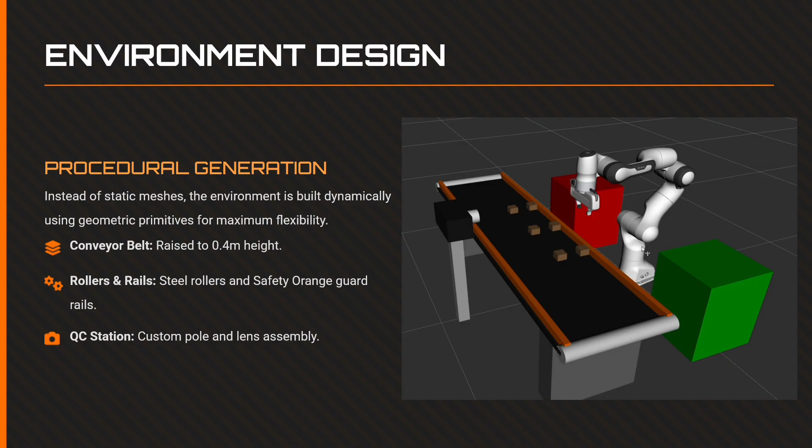First, the environmental design. Rather than relying on static mesh files, I utilized procedural generation within the code. I constructed a realistic conveyor belt system using geometric primitives: a black rubber belt surface, polished steel rollers, and safety orange guardrails. This required precision calibration, as placing the belt at a height of 0.4 meters meant retuning the robot's grasp parameters to avoid collision.

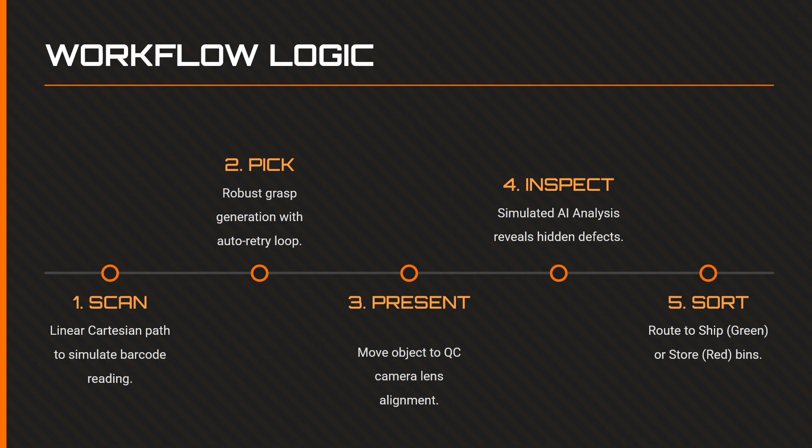Second was the manipulation logic. I moved beyond simple point-to-point movement. This robot executes a complex state machine. It performs a linear scan using Cartesian path planning to simulate reading a barcode. It utilizes a retry logic loop, attempting three different grasp solutions if the inverse kinematics solver fails. Finally, it brings the object to a custom quality control station, a camera assembly I modeled in the simulation, aligning the object specifically with the lens for the inspection.

Third, the graphical user interface. I developed a full dashboard using Python's Tkinter library. This GUI replaces the command line, offering a real-time status bar, a dynamic inventory grid where buttons disable automatically to prevent race conditions, and a decision panel that only unlocks when the robot is ready for the human input.

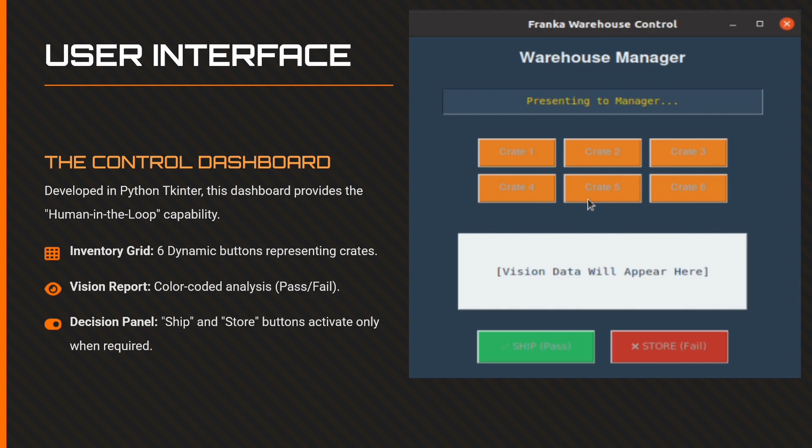Finally, the creative component. I implemented simulated computer vision, a backend database that assigns hidden defects to crates when they spawn. The system reveals this data only when the robot presents the item to the camera station.

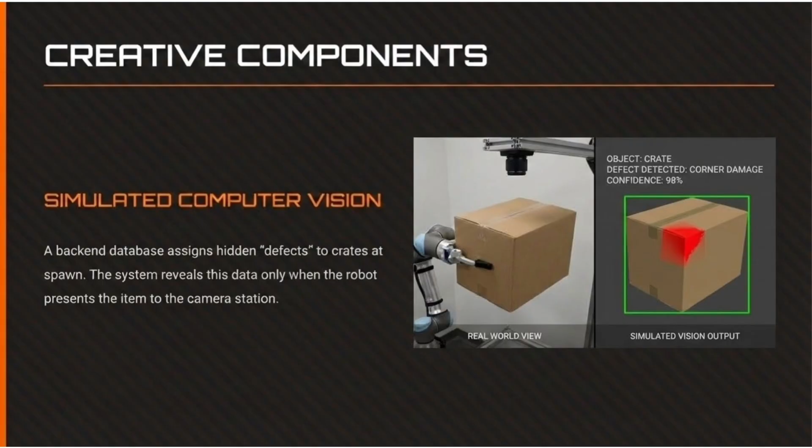Moving on, core challenges. Early in development, the application suffered from critical crashes known as X11 BadLength errors. This happened because Tkinter runs on the main thread while ROS callbacks and MoveIt commands run on background threads. When the robot tried to update a GUI label directly, it corrupted the memory.

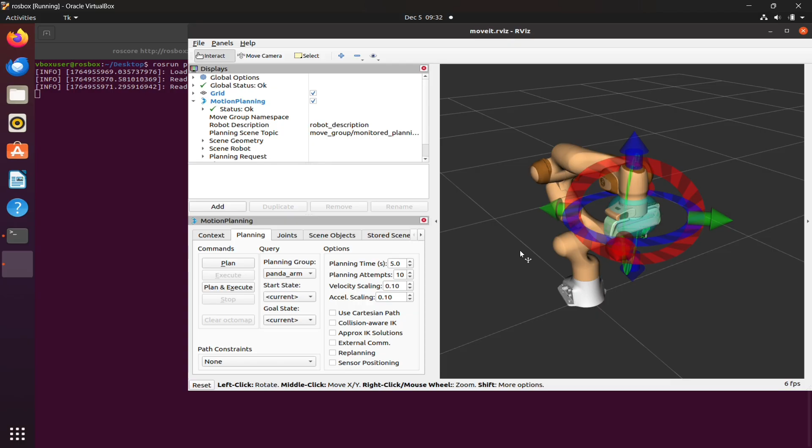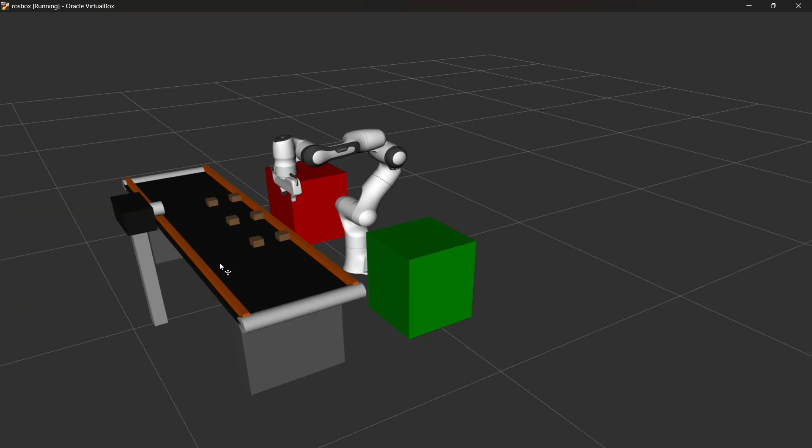So, here I load up RViz and my project file. I'm setting up the environment for an interrupt-free simulation demonstration. Just a second. And here I add my robot model. I make it full screen. I'll load up my GUI. As you can see, the robot has been loaded up with the conveyor, 6 crates, and a shipping or reject container.

Okay, so in my GUI, now I'll select a random crate. The robot goes and initiates the picking logic and presents it in front of the camera. As you can see, I have passed it according to the result. Next, I select crate 3. It goes again, initiates the logic, scans, and this time I fail it even though the result is okay.

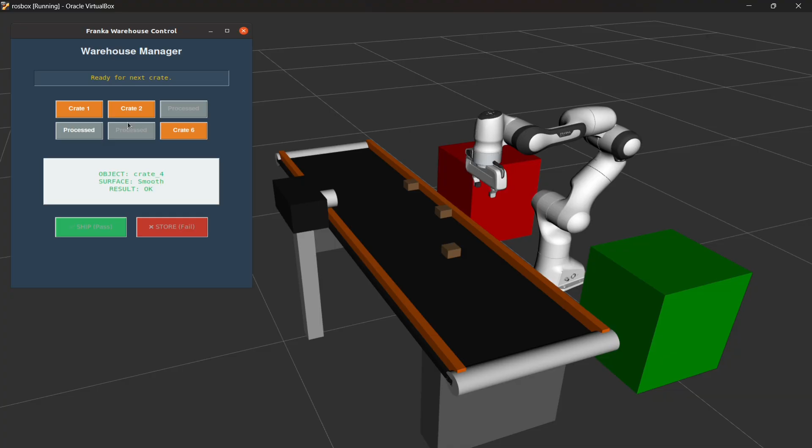Crate number 4. Again, I passed it. Let's see if I get any failed results. Crate number 2. Oh, it has also passed. Next, let's hope for a failed part this time. Yep, crate number 6. And here we go. It has defects, but I will still ship it.

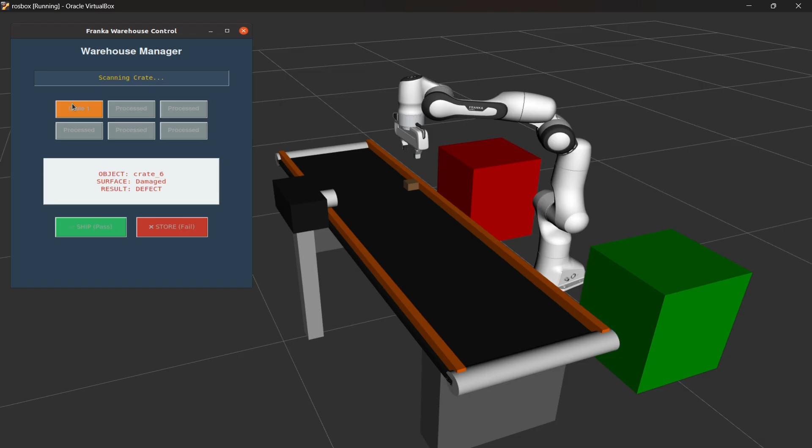Let's see the last crate, number 6. And it also has a defect, and I store it as it has failed the inspection. And here we go. This ends the demonstration.

Finally, conclusion and future work. In conclusion, this project demonstrates how ROS Noetic, MoveIt, and Python can be combined to create a robust industrial-grade application. Regarding future work and real-world implementation, I propose 3 next steps.

Computer vision: replacing the random defect generator with a real OpenCV or YOLO model to detect actual scratches on physical parts. Hardware deployment: swapping the simulation time parameter for real Franka Panda drivers to deploy the code on physical hardware. Cloud analytics: integrating a SQL database to log reject rates and operator reaction times, providing valuable data to the factory manager. And that's my project.